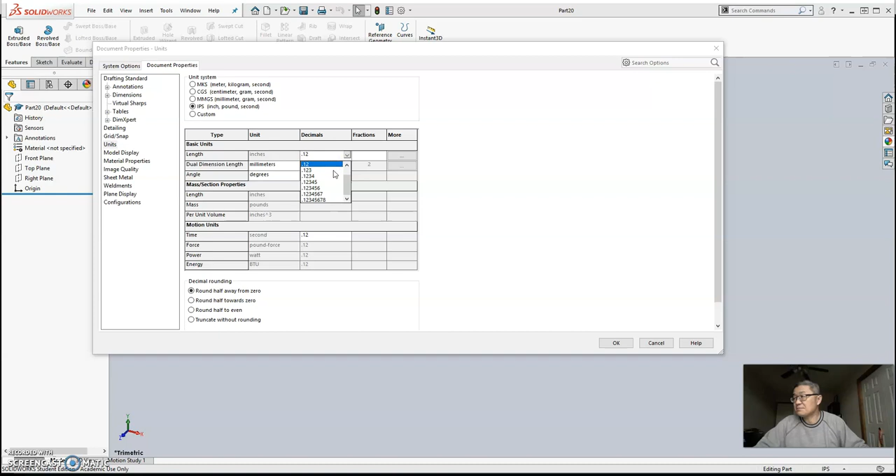If it's not, you can go to Tools, Options, Document Properties, ANSI, Unit. Make sure inch, pound, second. Also make sure you have 3 decimal places, and click OK.

So this sets up the drawing environment for us. For this one, I'm going to choose front plane, make a sketch. First, I want to draw a circle.

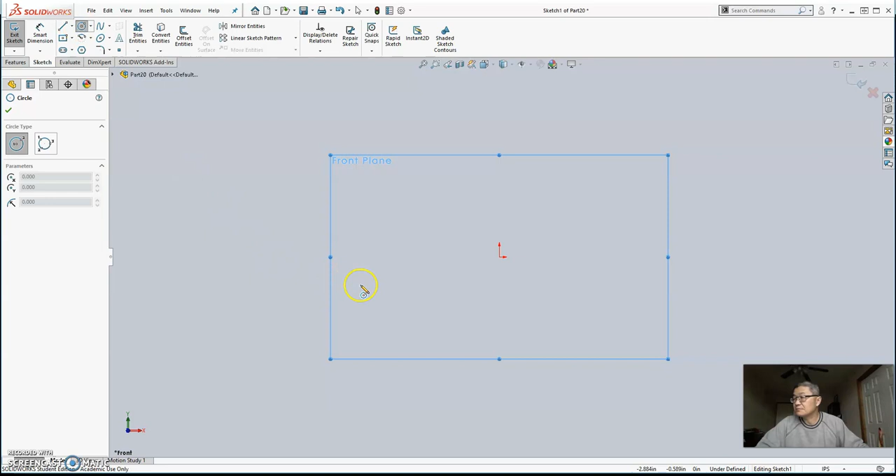Make sure the center of the circle snaps to the origin. Move cursor a little bit away. Once again, if you see the bottom status bar, it says undefined because we did not give an exact diameter of the circle. Click Smart Dimension. Click anywhere on the circumference.

The diameter for this one actually is 0.4375. Remember, we only choose 3 decimal places.

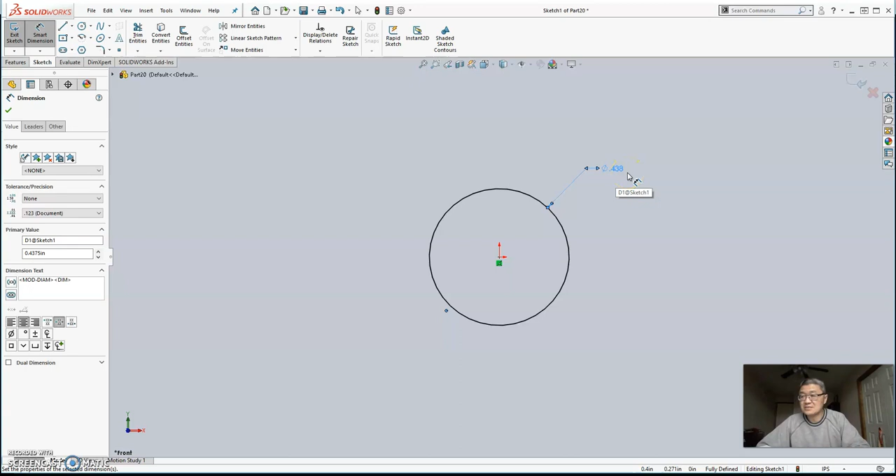If you input 4, it will automatically round up. Once that's done, you can click Enter. So it gives you 0.438 because we only choose 3 decimal places. Most of cases, 3 decimals should be plenty. Now, if you notice the status bar, it says fully defined.

Now we go to Feature, click Extruded Boss/Base. For this one, I want to choose the middle plane. Choose Direction 1, middle plane. That is to ensure

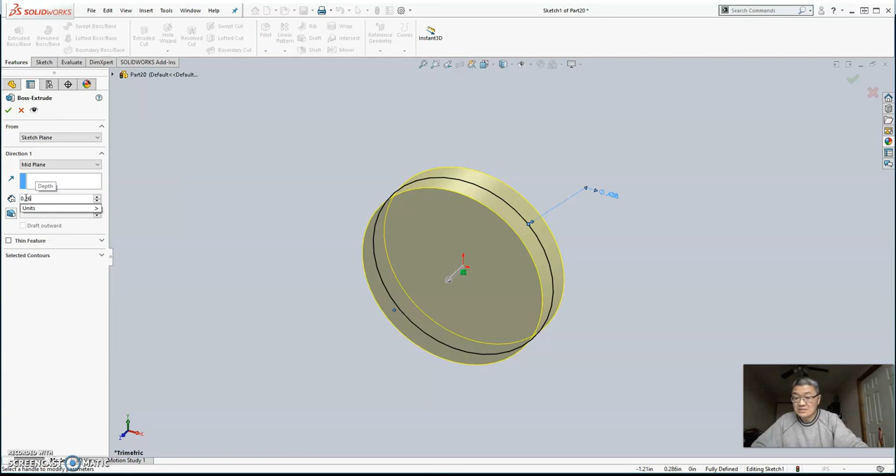the origin is in the middle of this axle shaft collar, and the depth should be 0.25. That's the shaft, so the total is 0.25 from the middle plane, so middle plane right in the middle.

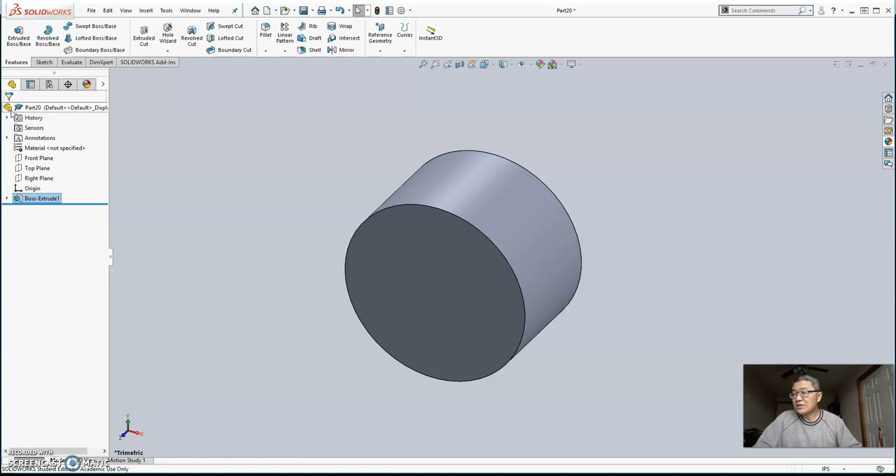So click this green check. So we finish our cylinder essentially. Now I need to drill a hole right in the middle. So what I'm going to do is this way.

Look here, we have 3 surfaces we created. I want to click this front surface. Now the front surface turned into blue. I'm going to click the sketch right here. That means I'm going to make a sketch on the front surface we just created, not on the front plane. Of course, this front surface is parallel to the front plane.

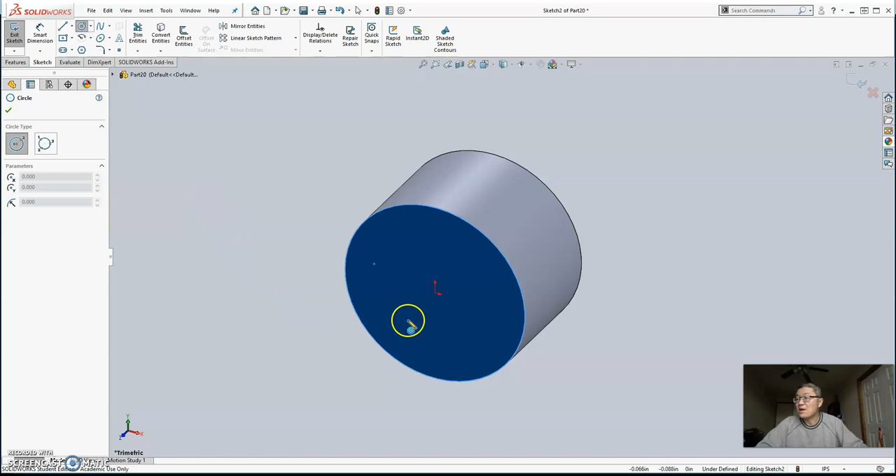Okay, make a circle. Make sure once again the center snaps to the origin. Move cursor a little bit away. Use your Smart Dimension. Click anywhere on the circumference.

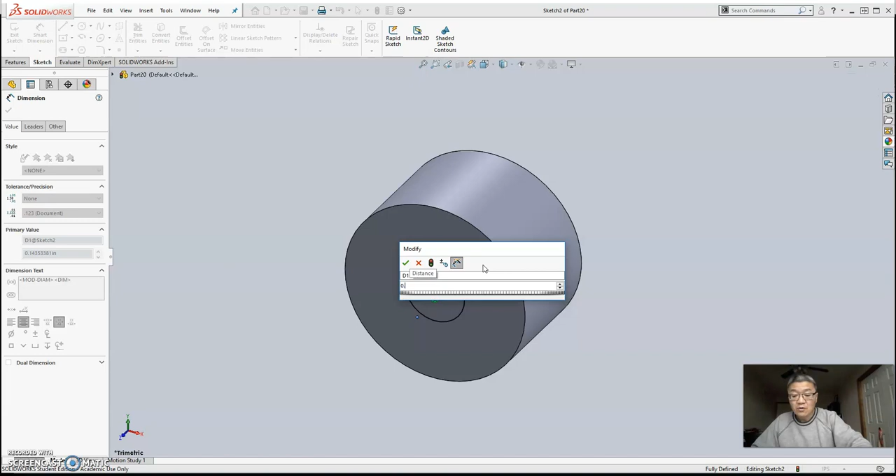And for this one, the diameter actually is 0.190. Now it is fully defined because we give a center, we give a diameter, so it's fully defined.

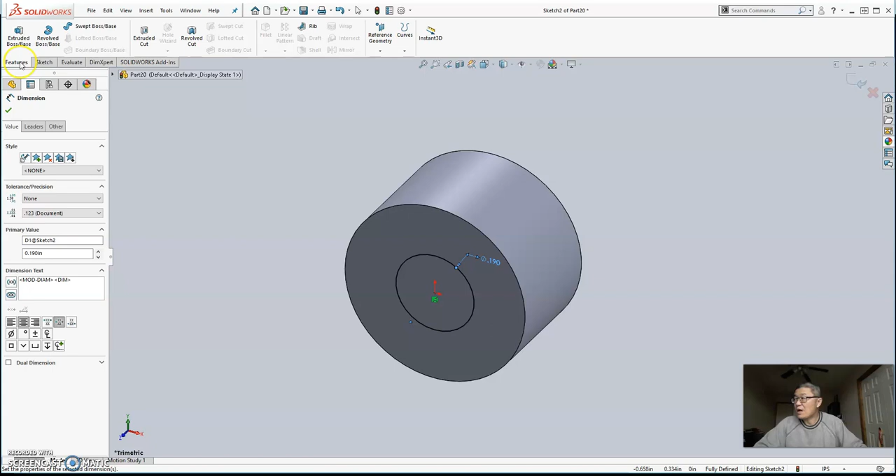Now we're going to click Feature. For this one, I'm going to choose Extruded Cut, because I want to cut a hole which the axle can be put through.

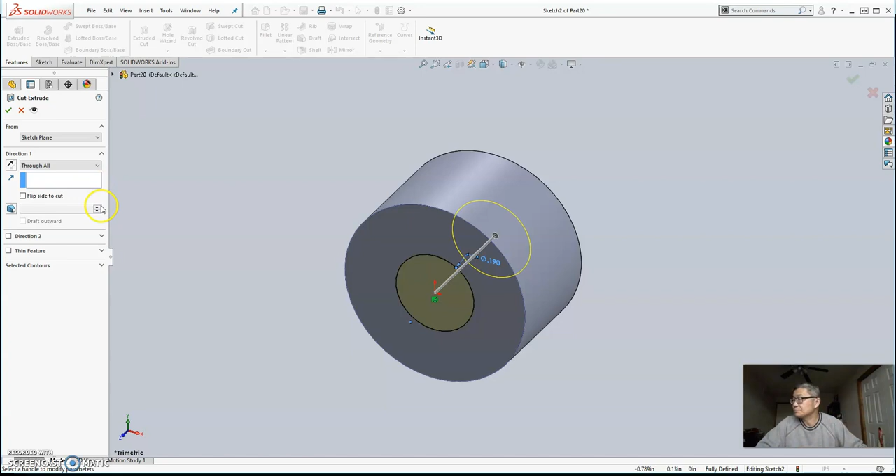For this one, Direction 1, I want to make sure that it's Through All. So that means no matter the depth, the collar is going to cut through. Now click this green check.

Now, if you click your middle wheel of your mouse and hold it, it rotates. You will notice that this object is a through hole.

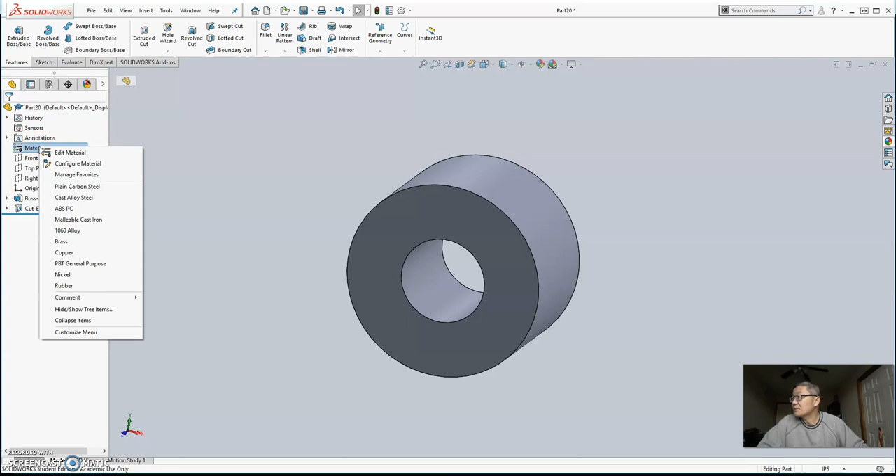Now we can do a little bit of investigation. We make this collar. If you notice that is a material, I want to click this material. Right click, edit the material.

We can choose a material for this collar. For instance, you have a bunch of materials to choose. So you have steel, you have different types of steel. Also, you have iron, you have aluminum alloy, you have copper alloy. Let's just choose copper. Let's click this copper, let's choose the basic copper.

Once you choose the material, it has different properties such as the elastic modulus, you may have Poisson ratio, shear modulus, density, so on and so forth.

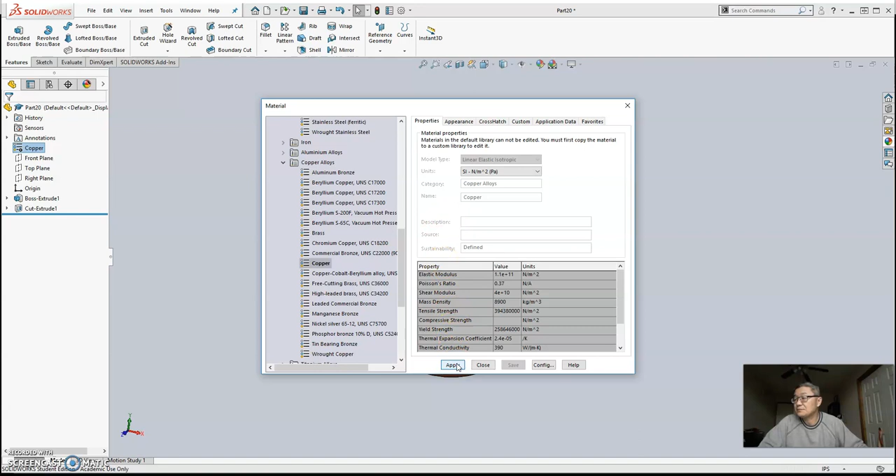Click Apply. Oops, click Apply. Apparently, for some reason, it refused to apply that for me. I'm going to click Close. It did apply, it just forgot to close.

So we make this collar, and this is the simple way to make the object. And we set the materials. Now we do a little bit of investigation.

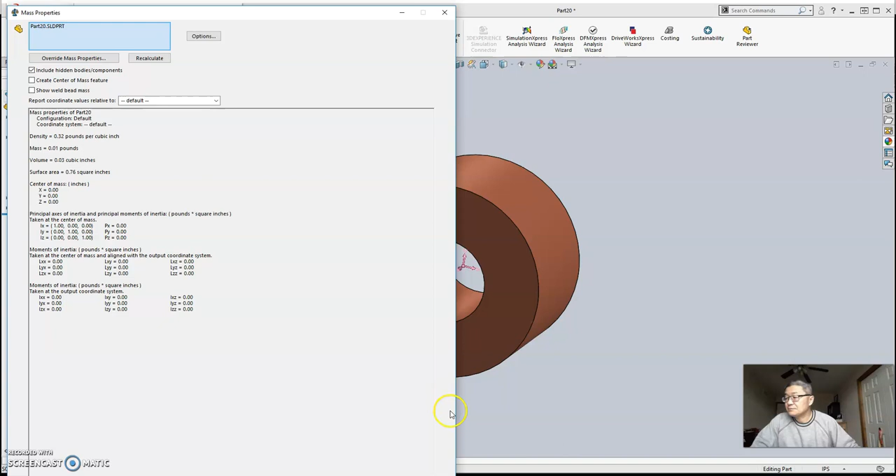If you click Evaluate, okay, we have an object with exact dimensions. We can see how heavy this part would be. If you click over here, it actually shows the center, the origin, that is 0, 0, 0. That means the origin is right in the middle.

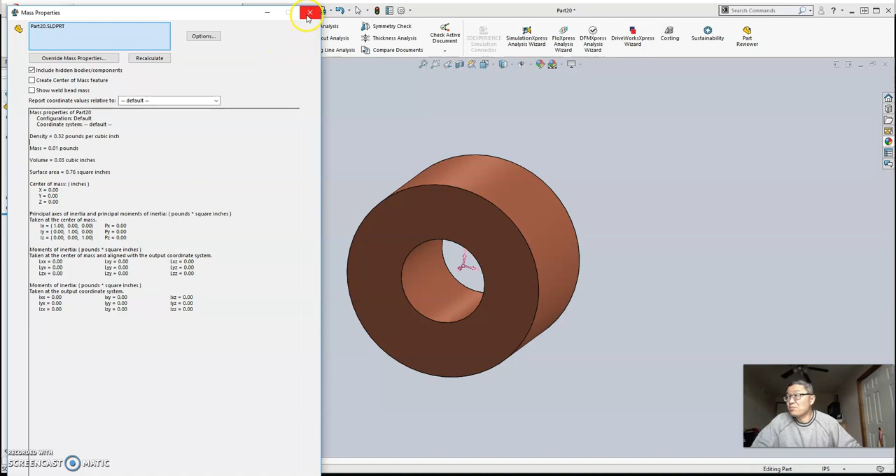Also, it gave you, once again, the mass. The density of the copper is this much, the density of this object is this much, and the mass is 0.01 pounds. That also gives the volume, gives the surface area, gives the center. That's essentially the physical property of this object.

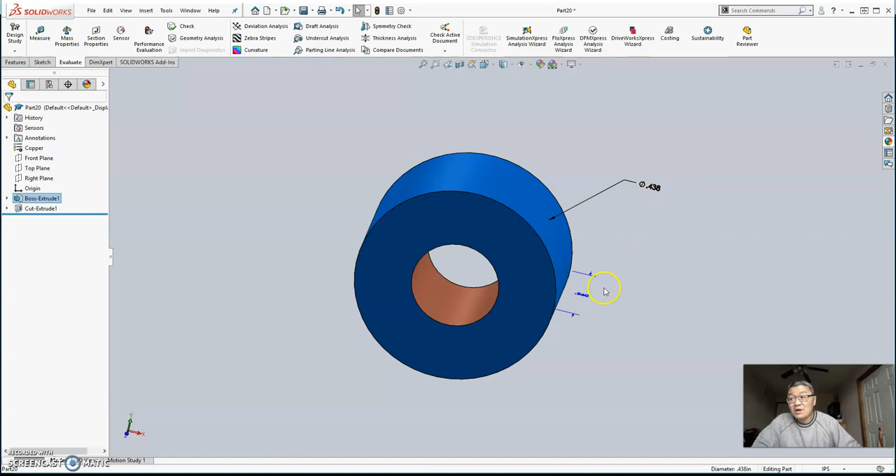Also, if you want to click the surface of this cylindrical surface, if you double click that, you'll notice that some of the properties we put in show up right there. Remember the diameter 0.4375, also the thickness 0.25, if you remember that, right?

Now double click this one, 0.25. Oh, actually, if you notice, I put something wrong, that is 0.26. Actually, it should be 0.25. So now you can correct it—SolidWorks gives you the opportunity to correct your own mistake. You fix that, click this green check. So 0.25, once again.

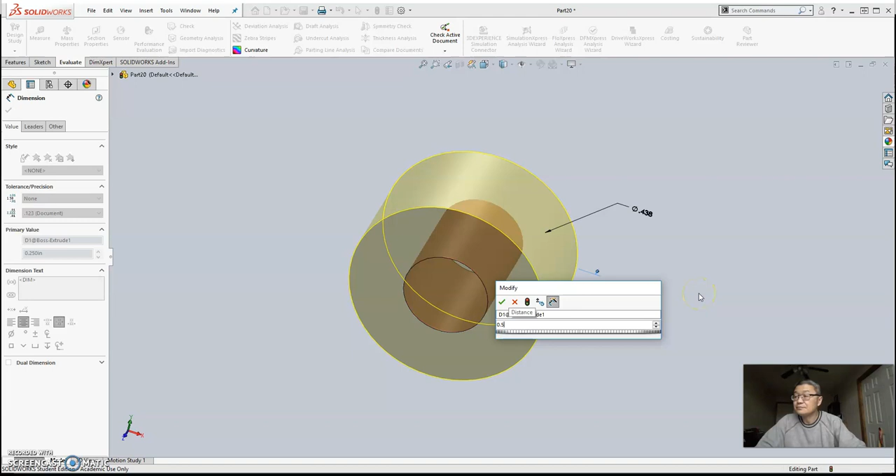Now let's say double click this one more time. Oh, 0.25 is not correct, it should be 0.5. Just correct it, become 0.5. Click Enter, so it fixes the dimension accordingly.

Now, of course, this is not the right one. It should be 0.25. Just hit this undo. Should be 0.25. Okay, let's save this file as...

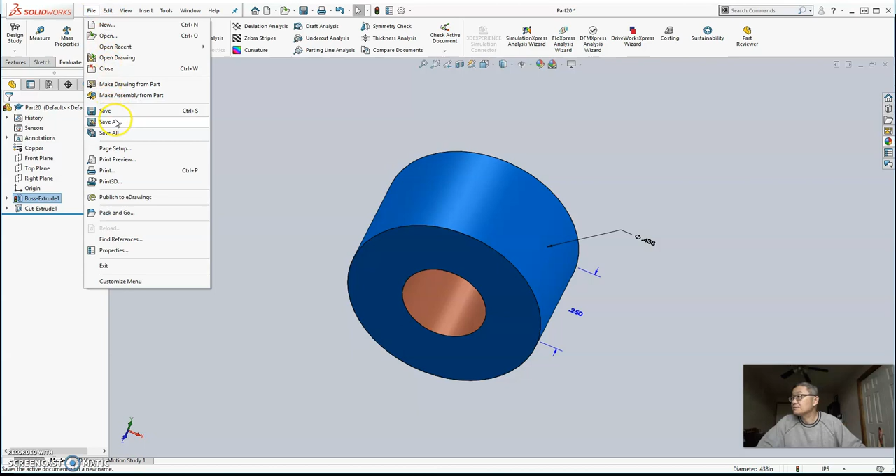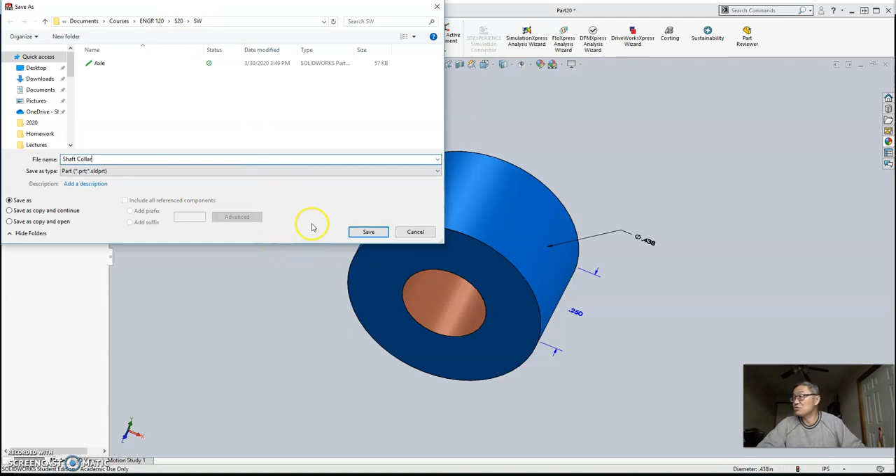For this one, we're going to save it as a shaft collar. Make sure you save it into the correct folder. Rebuild and save the file.

Typically you want to put it into isometric view. Click this one, that is the isometric view, and save it one more time.